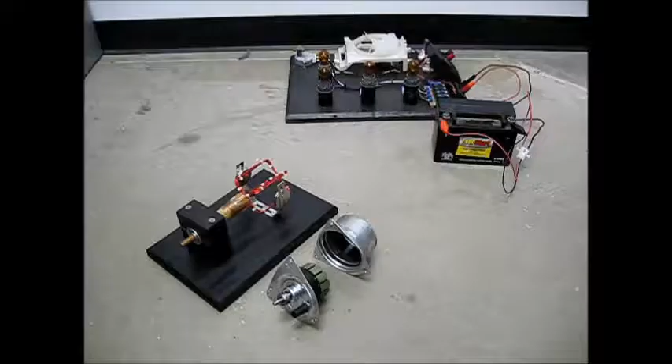Like I have some electrical demonstrations to really illustrate that concept that's very, very hard to visualize and see what's actually happening with anything electronics, or even for something like transmissions or final drives. I've got something in the works as well, and I'd like to show that to you. So I kind of wanted to show you some of the innovations that I've been doing, some of these personal items I've made to help bring my teaching to the next level, to really help the students understand what exactly is going on.

So right here we have the basic concept behind how a motor operates. Right here we just have this whole armature assembly and copper pipe made into a little commutator assembly. I took some solid wire, the specific wraps. We have a coil right here, coil right here. Whenever you send current through the commutator bars on opposing ends, once it flows, it generates a magnetic field. Then we have two opposing magnets, and the interaction between them is what causes that to rotate. And that's exactly the principle behind how a lot of these DC motors work. So once they see that, everything sort of makes a lot more sense.

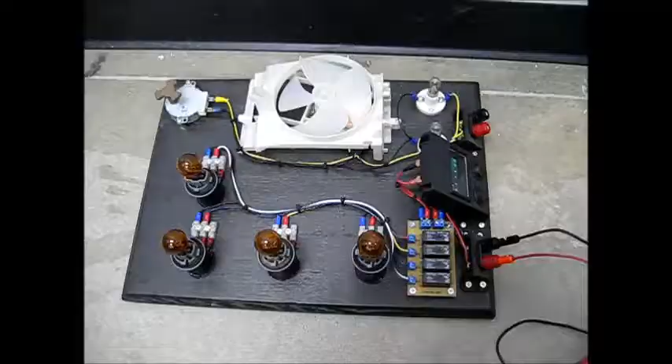So right here we have another display piece that I made, and this is to help illustrate to the students the differences between a series and a parallel circuit. So right now we have a printed circuit board with 4 relays, and they're wired in such a way that whenever we flip the switch, it'll actually switch automatically between a series and a parallel circuit. So when we turn this on, right now this is wired in series, and that is reflected in the overall current of 2 amps. These are fairly dimly lit until we switch over to parallel. And I don't think you can see in the camera, but this needle from the ammeter actually spiked up to 9 amps, and the overall brightness, as you can see, has increased.

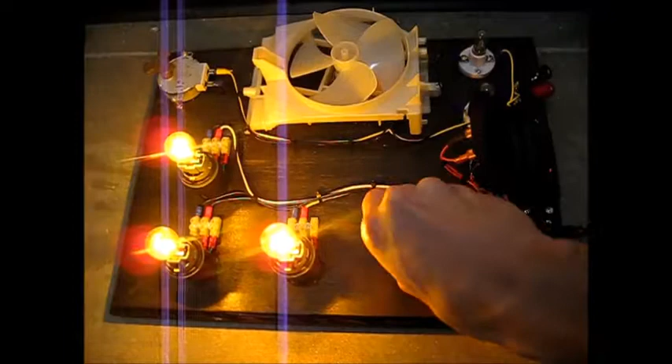Another cool thing is whenever you pull the bulb out in a parallel circuit, it won't affect this until you switch it over to series, because now you've essentially created an open circuit whenever you've taken this bulb out until the connection is restored. You replace the faulty bulb. We attempt to plug this back in,

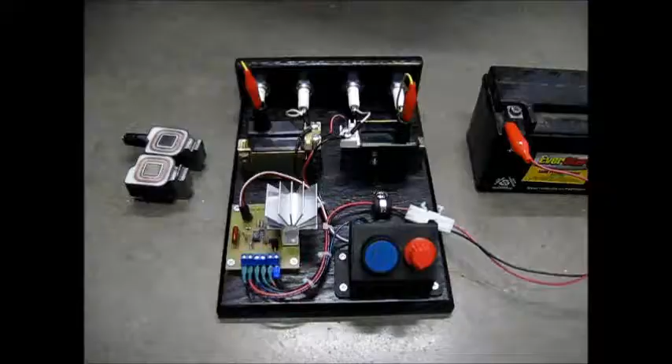and connection is restored. So here's another cool display board that I made fairly recently. It's going to take an input of 12 volts, step that up to 20 or 30,000 volts, and really that's the basis behind how a lot of modern ignition systems work now for gasoline engines for the final combustion process via these ignition coils right here. That's why I also did a little cutaway model of that ignition coil, so the students can see the difference between the primary and the secondary coil, the number of turns of the secondary versus the primary, and how the magnetic field collapsing or changing will actually induce a very, very high voltage in the secondary.

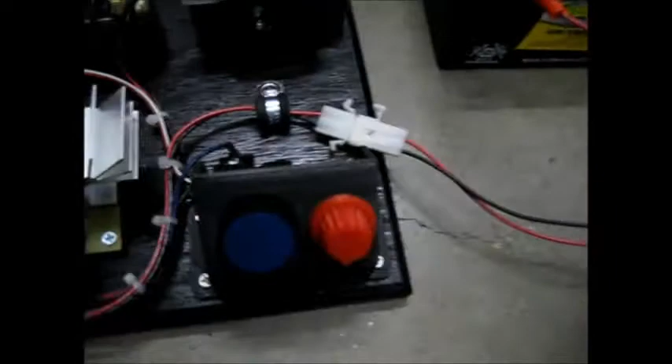So here, another custom printed circuit board with a 555 timer, and we have a little potentiometer input that's going to directly correlate to how quickly the gate of the transistor switches the primary circuit on and off of these ignition coils, which will directly affect the output right here. So what I'm going to do is press the switch, start changing that input to the timer, and that's going to directly control the output going to these spark plugs, which is reflected in the overall strength as I dial it up, and you can hear it as well.

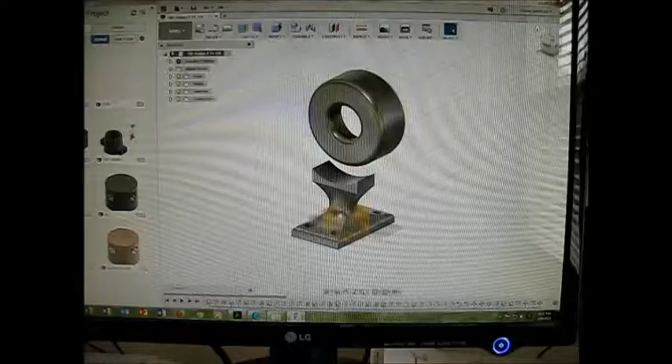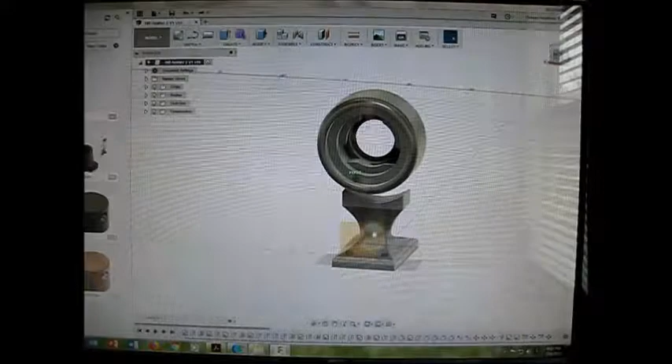So another cool innovation I can bring to the classroom is that I actually have access to CAD software at my home, and I'm able to draw up and design some stuff. Granted, my knowledge of CAD is fairly limited, but I'm still learning. It's a day-by-day process. But to give you an idea, it's a little HID bulb holder I designed and made so that I'm able to take this, convert it to an STL file, convert it to G-code, to where I can actually 3D print the final product. So the bulb would actually go into here. It's a twist, lock in place, and be good to go.

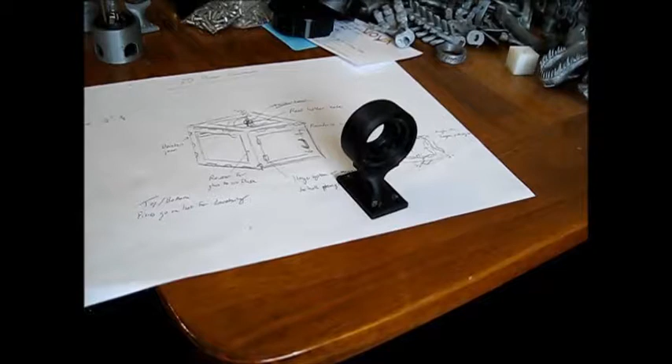So it'd be a little display board that this lower portion would actually bolt or screw in place. And this will eventually be a display board for the ballast and igniter unit for the HID xenon bulb assembly.

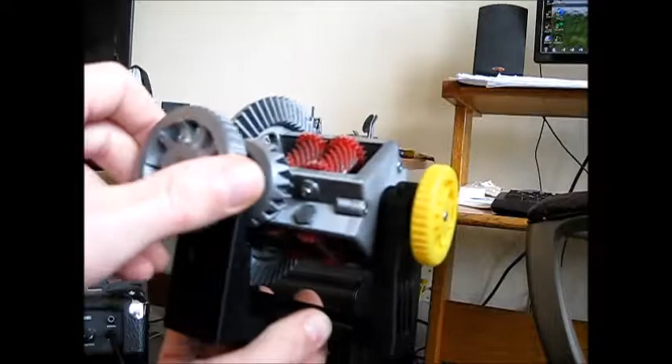So the really cool thing about 3D printing is that you're able to bring a lot of innovation into the classroom. And there's just so much potential with 3D printing out there that I couldn't resist getting one. This is printed off my own 3D printing device at home, and this is a working Torsen differential model. This model I didn't design. All of this is available online for anybody to download if they have a 3D printer and print it out, so they can really see how things work.

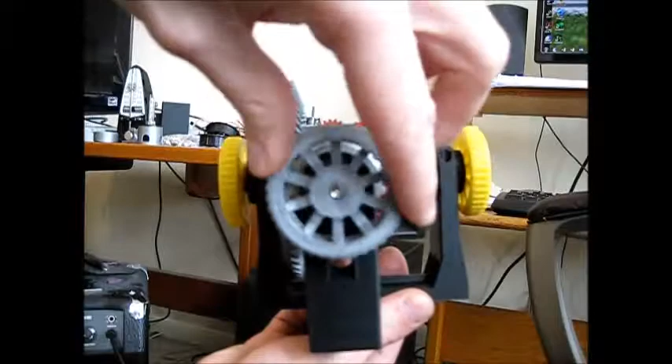But you can see why this is a very effective teaching tool. So this will represent your drive shaft attached to the pinion gear. When you rotate this, it rotates the ring gear, which in turn rotates the whole carrier assembly. And when you rotate this, you can see both drive wheels spin at equal speeds.

If I hold one drive wheel, which represents when you're cornering, you can see what happens with the worm wheels and worm gears within the carrier assembly. See how they rotate around? So again, very, very cool teaching tool, and that's sort of the aha moment that students see when they start realizing how this works. So very, very cool.

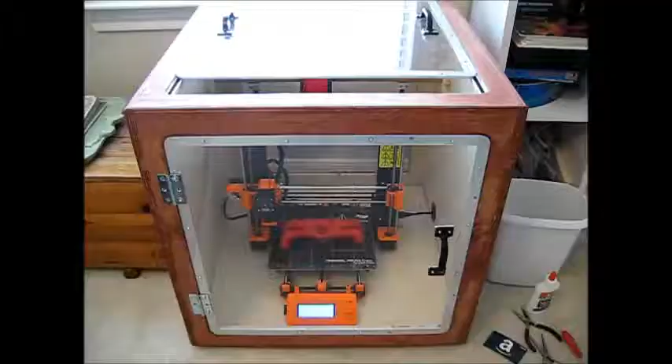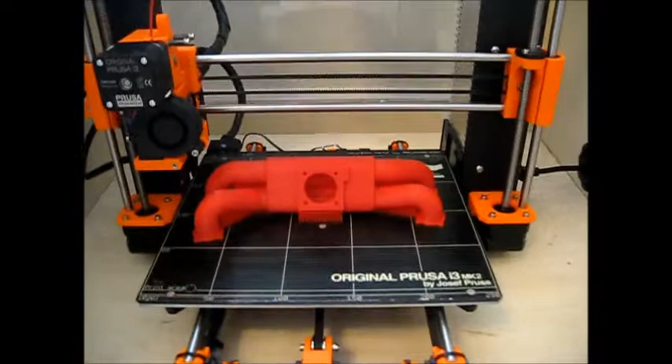So this is the 3D printer I use. This is a Prusa i3 MK2. And this is what I used to print a lot of the components I actually showed you. And what we have in here, I actually just got back home from work. This is going to be an intake manifold for a Subaru WRX EJ20 engine, and I can actually show you real quick. And this enclosure I actually built as well, and that's going to help print some of the trickier filaments.

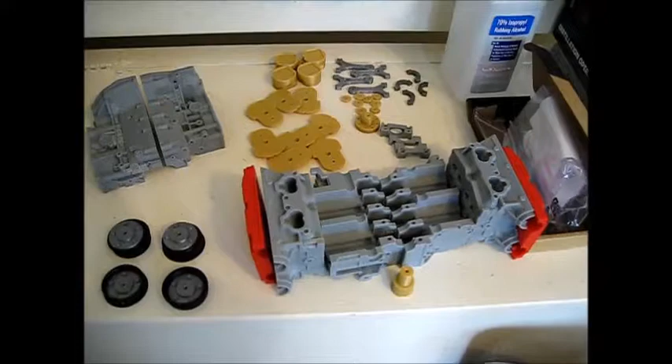But if you look back here, this is going to be a working model engine, cutaway model, and again, there's no way I had this much talent to design this. This is actually designed by Eric the Pool Boy, someone on Thingiverse, a complete working, accurate model of an EJ20 engine, and again, very, very helpful tool for understanding the different engine cycles, and this is a different type of engine, and it would be very, very helpful to show the students this in the classroom.

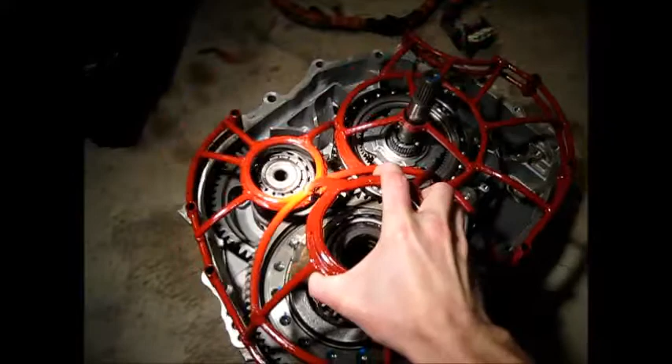But in the meantime, I've actually constructed this unit, and I'm going to put this on and explain my reasoning behind this. So I'm going to put this on real quick. And what this does is this will bolt down to the case and retain everything in place, so the students are able to actually see the workings of the final drive assembly whenever the motor generator is actually running.

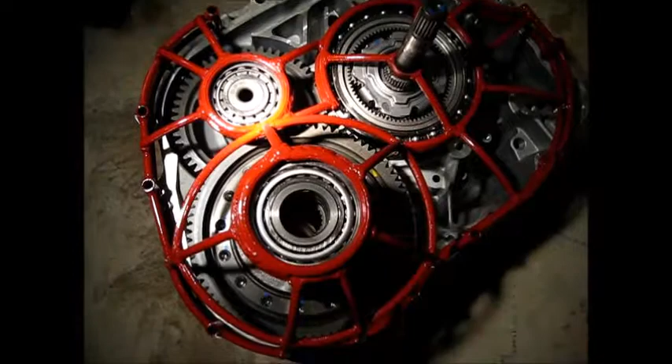But another thing I'm planning on doing as well, if you look down here, I'm going to draw up and design a shaft to interact with the side gears and that pinion shaft down there so the students are able to rotate this, which in turn will rotate the large rotor, motor generator two. And what you can do is hook up a load to it like a light bulb, and they can feel for themselves just how much effort it actually takes to generate the electricity to light the bulb.

And you can also short the windings out, and it will effectively lock up the entire unit. It was very common that if the stator windings were shorted out, the vehicle would be towed in and the wheels were locked up. So just another couple ideas that I've been working with. Hopefully this will show you some of the innovations that I am attempting to bring into the classroom to help students understand some of the more complex systems. And really and truly, this is something I'm really passionate about, and I hope that shows in some of the projects I'm undertaking on my own.